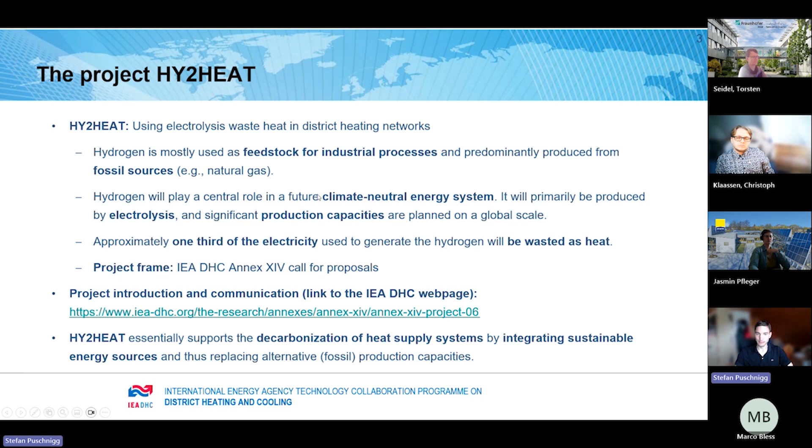The aim of the project is to assess the volumes and expected capacity of electrolyzers in the future, how we can best integrate them, and what could be a guideline for district heating operators so they can really use that waste heat in the future.

The project was conducted for several reasons. First, we want to raise awareness among policymakers that we take the right steps now, so we don't forget about that unused, or mostly unused, waste heat potential. We want to support district heating operators and companies investing in hydrogen production capacities, showing them that it might be feasible from a technical-economic side, but also a process-technical side, to integrate this into their systems.

It can also be a solution for future district heating networks running on lower temperatures, so that you can directly integrate the waste heat from the electrolyzers into their district heating network.

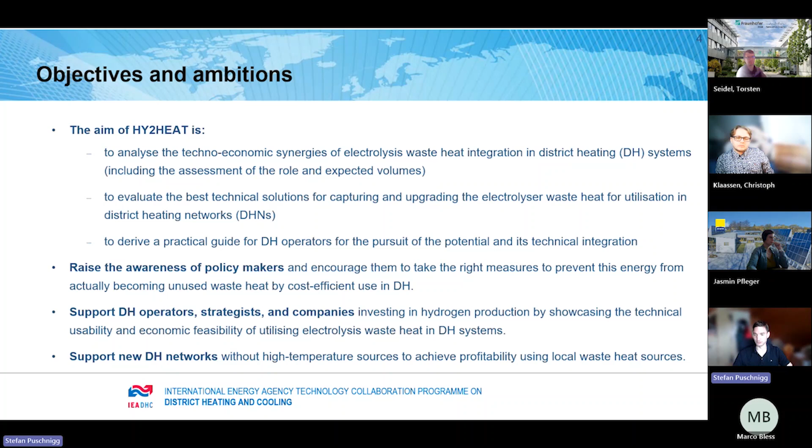We call these the 3 key dimensions: hydrogen, electricity, and heat. Based on these 3 key dimensions, an operational strategy needs to be developed, and depending on local characteristics, this might differ. For example, the full-load hours of electrolyzers per year could be one key parameter that defines your operational strategy and how much waste heat you can expect.

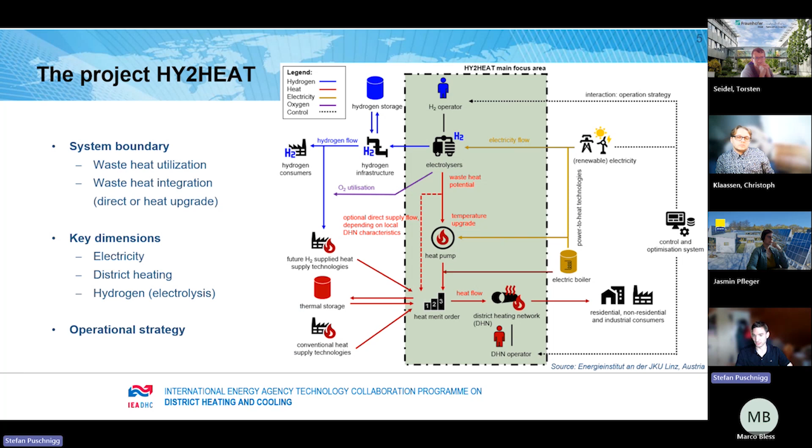We started the project with an analysis for the IEA DHC member countries on what electrolyzer capacities we have to expect for 2030, that's the figure on the left-hand side, and until 2050, that's the figure on the right-hand side. I don't want to go into detail on each country, but horizontally it's the IEA DHC member countries with their expected electrolyzer capacities.

You see a dark colored bar, and on top a lighter colored bar, which means there's always some range if you go into the roadmaps. So we analyzed the roadmaps and strategies to get those numbers for 2030, and there's a quite good picture already since we found data for every country on what their plans are.

If you take a look at the right hand side figure, the blue bars are related to 2050 values where countries have stated specific targets or strategies. If there's still an orange or yellow colored bar, that means no specific values were found, so there's no strategy until 2050 available.

In addition, we analyzed data from the European transmission operators, ENTSO-E and ENTSOG, who have a 10-year network development plan with simulations for a climate neutrality scenario of Europe. So only European countries are considered here, where they calculated the amount of electrolyzer capacity per country for a climate neutral Europe, shown as these green diamonds for each country. This shows whether a country has reached this target or not, which basically says something about how good the progress of each country is.

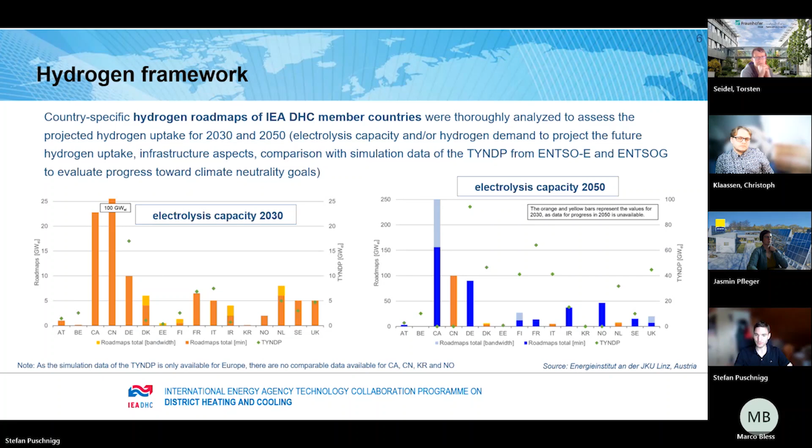By these electrolyzer capacities, we calculated the waste heat potential, assuming the full load hours. We made a sensitivity analysis and calculated, for comparison reasons, the electrolyzer waste heat per country, put it per capita, so we have a comparison.

In total for the IEA DHC member countries, that's around 408 terawatt hours for 2050, so that's almost a European district heating demand - that's just for comparison reasons. But you can find all the details for each country regarding capacities, waste heat potential, and sensitivity analysis in our final report once it's approved.

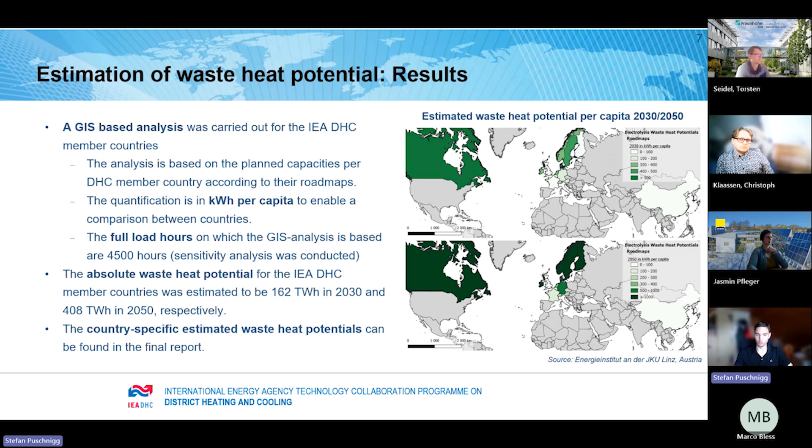For the technical integration part, we had a case study in Norway, located in Bodø. There we had a district heating network with supply temperatures of 80 degrees and return of 50 degrees. The current district heating network is based on a biomass boiler for the base load, with an electric boiler also for peak demands. There we analyzed the impact of an alkaline electrolyzer, which has a waste heat temperature of 55 or 75 degrees, depending on the operation settings. So we analyzed both scenarios.

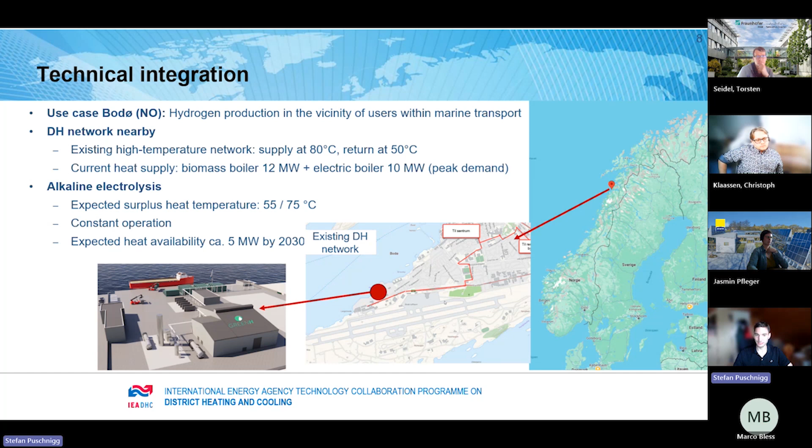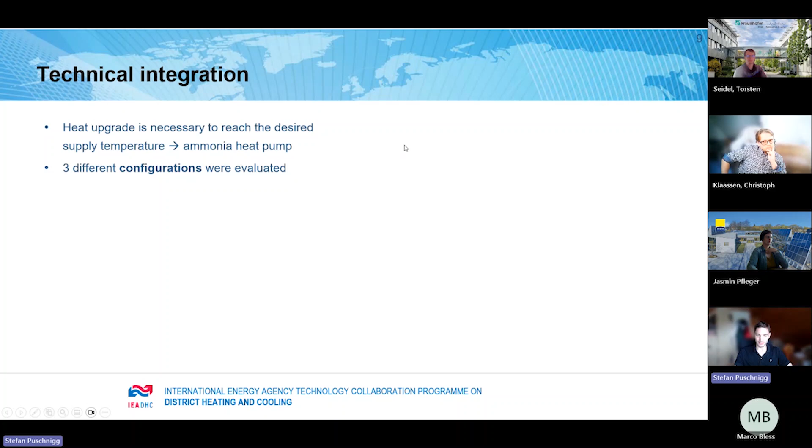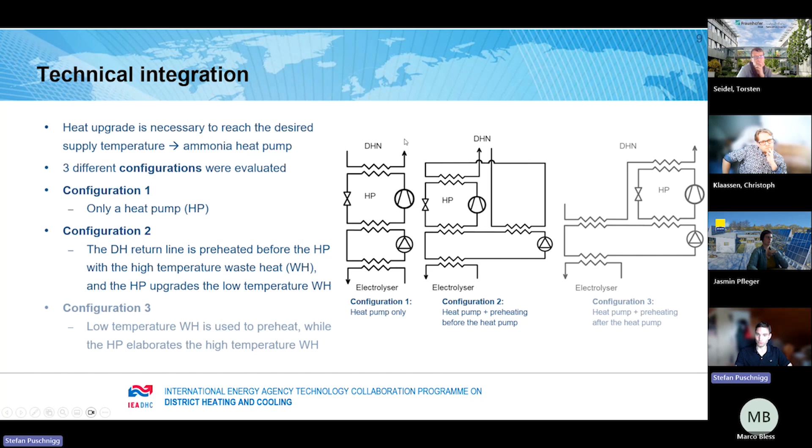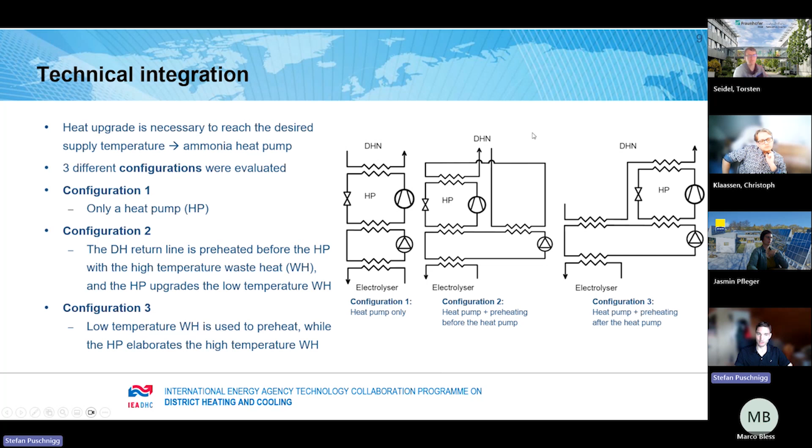Based on our technical integration, we tried to analyze 3 configuration options. The first is that you simply lift all the temperature available via heat pump to the required temperature of the district heating network, so only using the heat pump. The second configuration is that you preheat the return line before upgrading it with the heat pump to the temperature level. The third configuration is that you preheat the return line after heat pump upgrading. These 3 options were analyzed, and based on that we made some simulations.

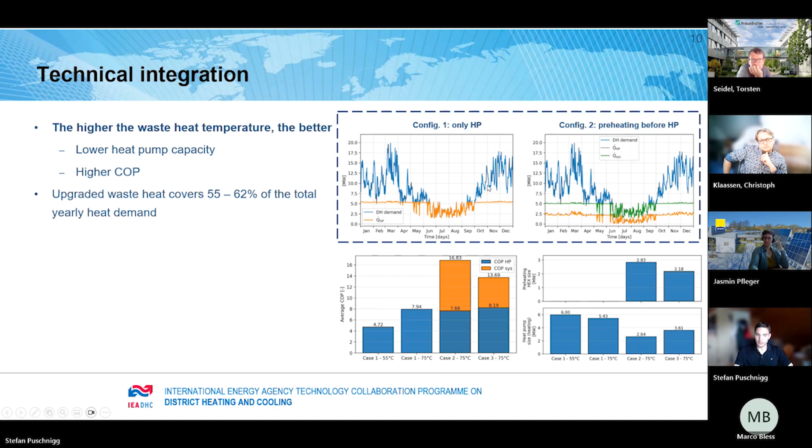The essential message from our analysis was that preheating makes the real difference when integrating the electrolyzer's waste heat. If you preheat, you can reduce the heat pump capacity by 50%, so that's essential, and you can increase your COP by up to 110% - from 8 almost to 17, as shown here. So that has a huge impact. The best case is always to preheat, as is shown here.

But of course, the requirement is always that you have at least a 10 degree Celsius difference in the temperature, so that you can really make use out of that.

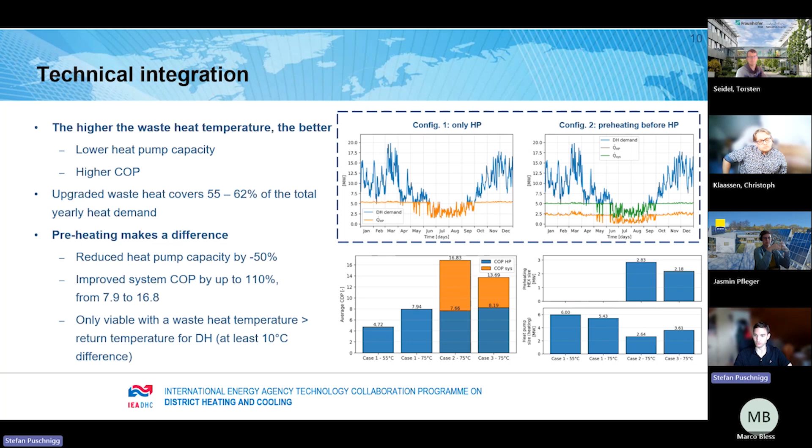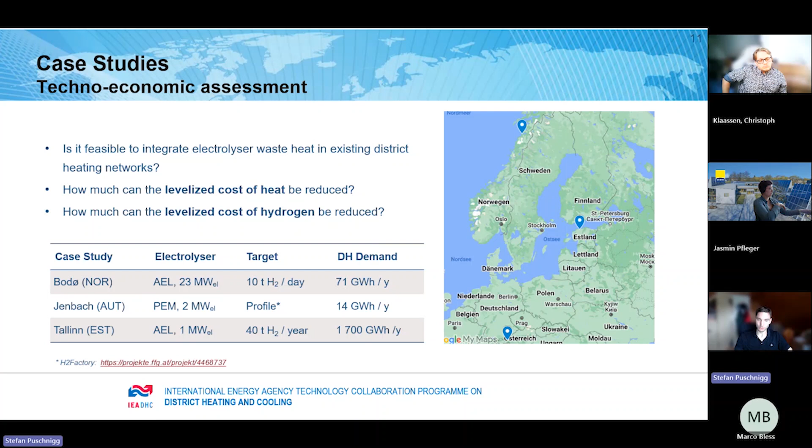Then for the techno-economic analysis, the question was raised: how much can the levelized cost of heat be reduced, or how much the levelized cost of hydrogen? That was based on 3 case studies, in Bodo again, but also one in Austria, in Jenbach, and also one in Tallinn, in Estonia. I'll just go over that compactly.

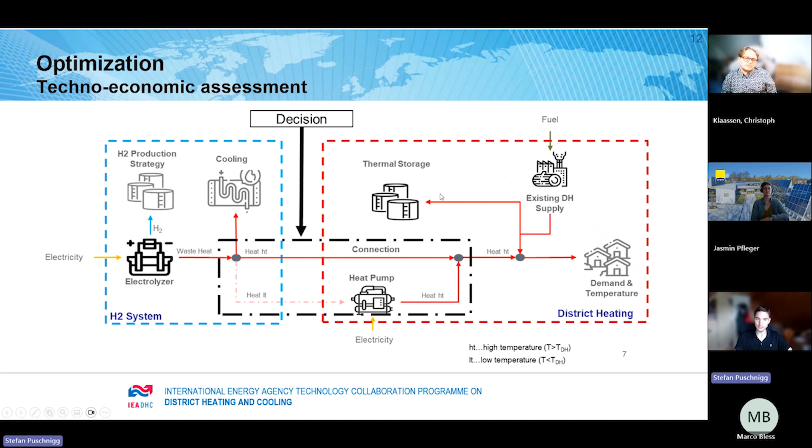So you have basically the hydrogen system, where you usually cool away the heat, so you have this constant operation temperature. And then the decision is, okay, should I use this waste heat in the district heating network where you have other competing temperature systems?

And if you compare the levelized cost of heat, you see, for example, in Tallinn, the impact was rather low since the electrolyzer's heat was rather limited compared to the heat demand. But for Jenbach and for Bodo, the levelized cost of heat, if you compare it with and without waste heat integration, that can reach up to 27%.

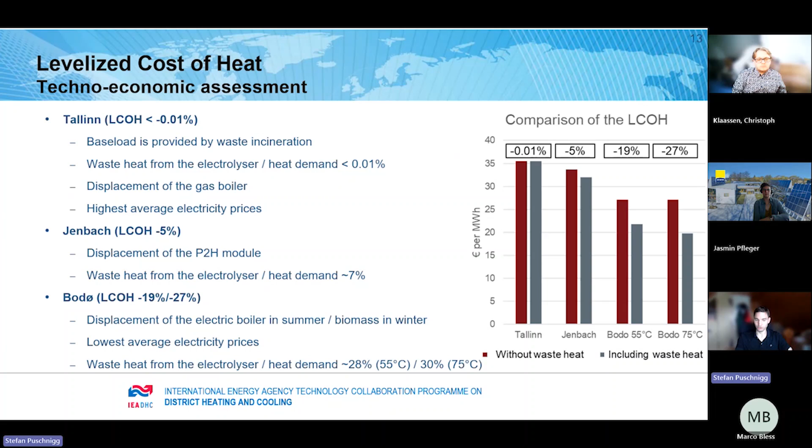The reason why it is so high for the Bodo case is that the ratio from electrolyzer's waste heat to the heat demand of the network is up to 30 percent. So that's the reason why the impact is then also that high.

And if you take a look at the levelized cost of hydrogen, you see that it can also be reduced. But this also depends on the full load hours. So the higher the full load hours, the more waste heat is provided, and the higher the impact on the levelized cost of hydrogen.

But of course here the electricity price matters too, it's listed here for Tallinn. The average price was rather high, with 91 euros per megawatt hour, compared to Bodo with only 33.

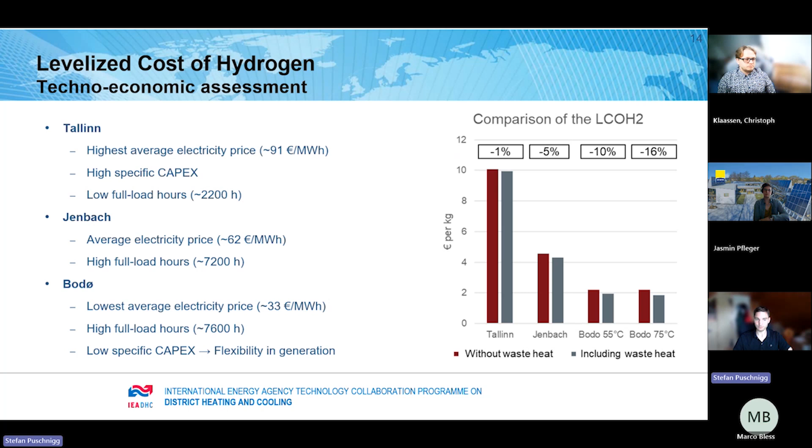And in the end, we also made a survey which was aiming to explore the key challenges and drivers of integrating that waste heat into the district heating system, with all the relevant target groups: researchers, district heating companies, electrolyzer operators, policymakers. We got 70 responses. You see here, sure, most of them were researchers, but nevertheless we had 12% of, for example, district heating companies.

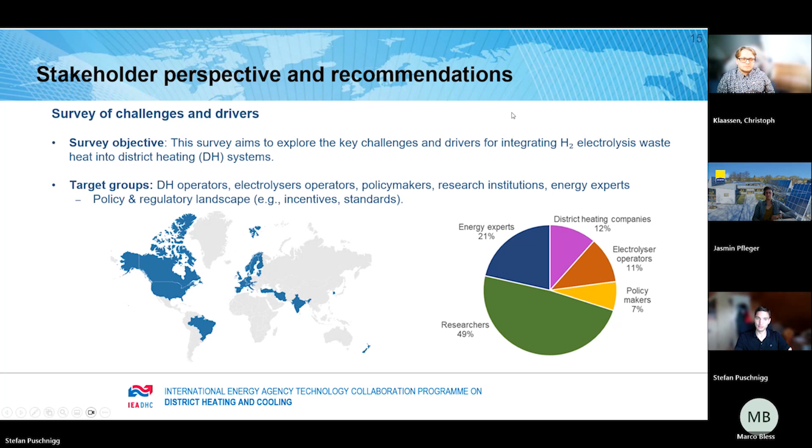And regarding all the operational strategies, it was stated that some use it, for example, only to produce the hydrogen. Some use it, for example, to store it on a seasonal level. Some operate the electrolyzer only to use excess renewable energy. So that's quite flexible at the moment.

And also from a technical point of view, that varies, since sometimes there's only minimal adjustments necessary, and sometimes you have to adapt the full infrastructure. And also in terms of costs, that depends on the technical requirements and so on, the operational strategy.

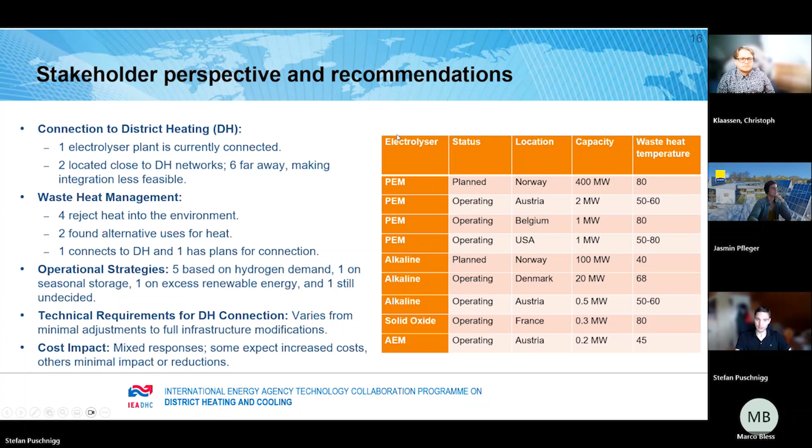And then we tried to get all the answers regarding challenges and to derive, based on the challenges, some policy recommendations.

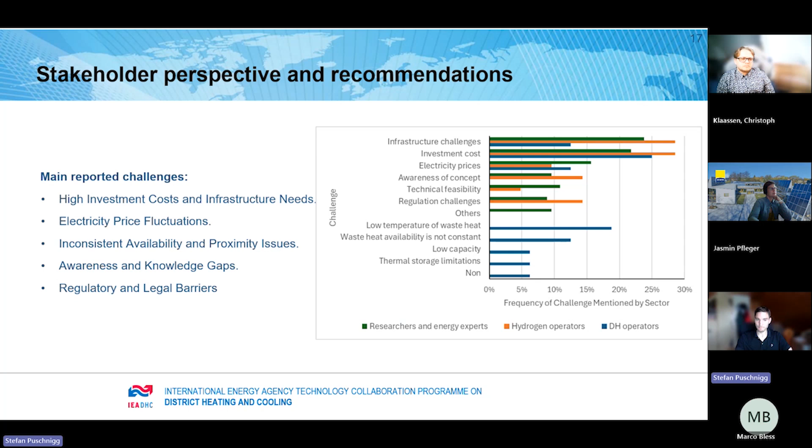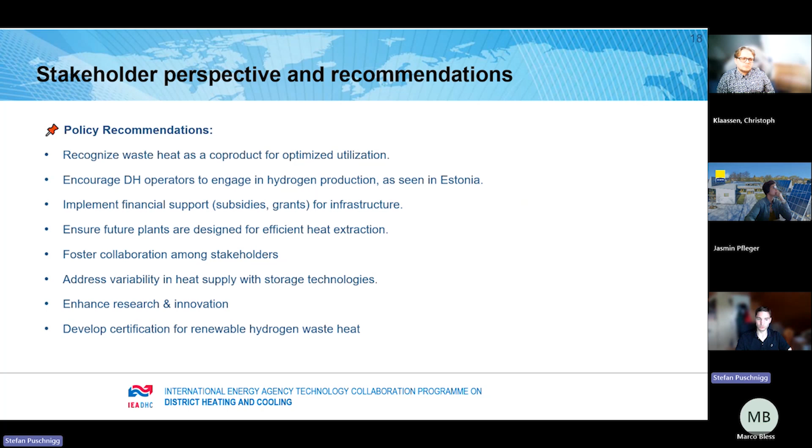I skipped the dissemination activities of the project, but we're active here at that level too.

To conclude: waste heat can support the decarbonization of district heating networks, but of course it depends on the operational strategies across the dimensions of heat, hydrogen, and electricity. Pre-heating makes the difference, so that's quite a good conclusion.

And if you think about the stakeholders, it's technically and economically feasible, but that of course depends on the case study, so you have to look at that from case to case. And now it's time to make the stakeholders aware to use that waste heat potential in their district heating network.

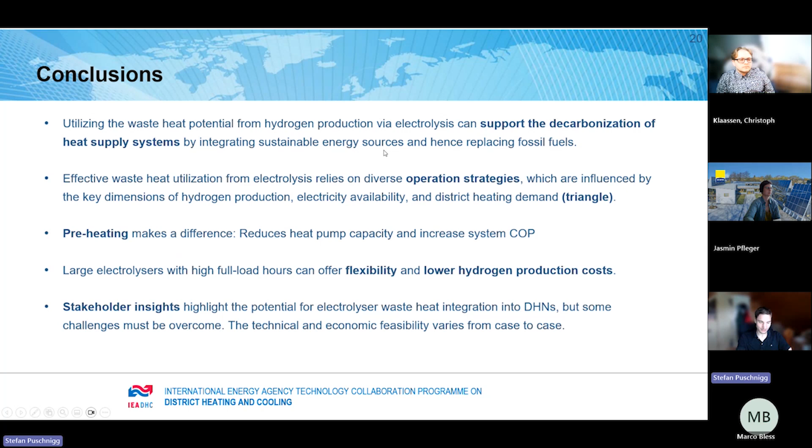That's from my side everything. So feel free to ask, or if you have further questions on that part.